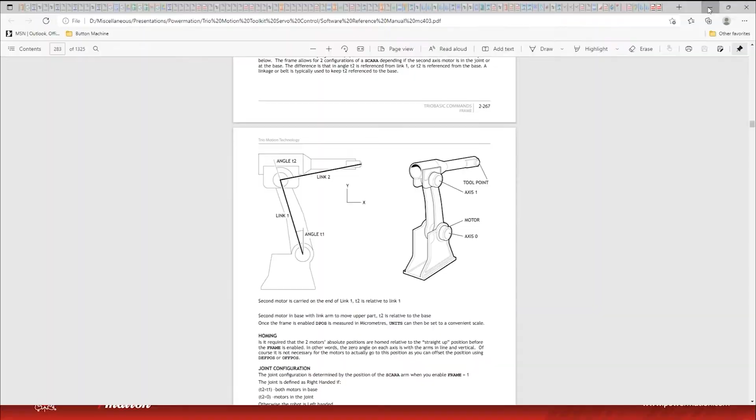The Trio Motion Toolkit is an add-on toolkit that supports the Trio Motion controllers and runs multi-axis motion for both steppers and servo applications. It's a full instrument driver library with supporting examples, with future support of EtherCAT drives and motors. The toolkit was developed with NI and approved by their LabVIEW Tools network and installed using the VI Package Manager. I will now give demos of different servo examples.

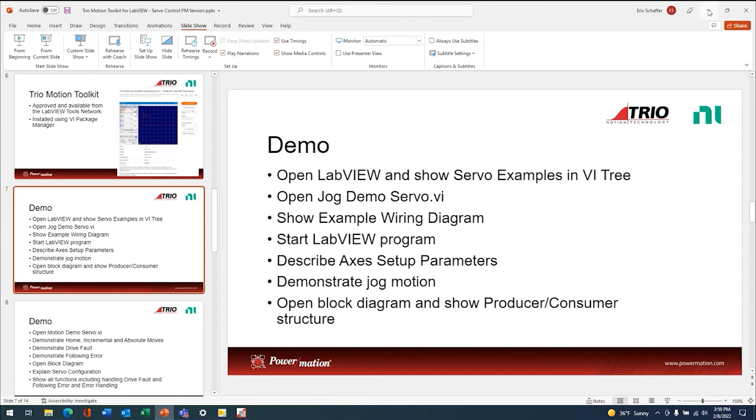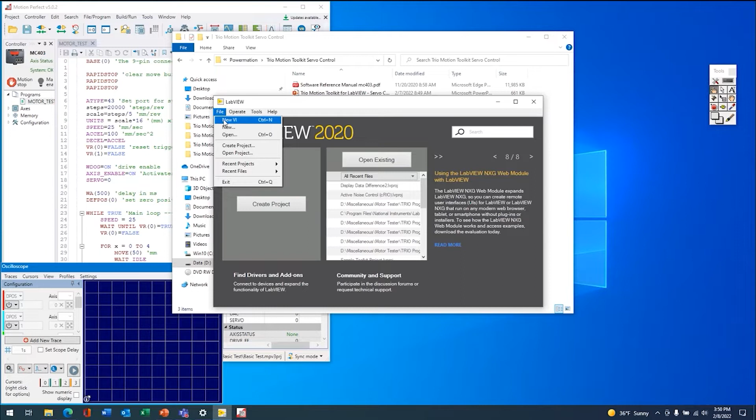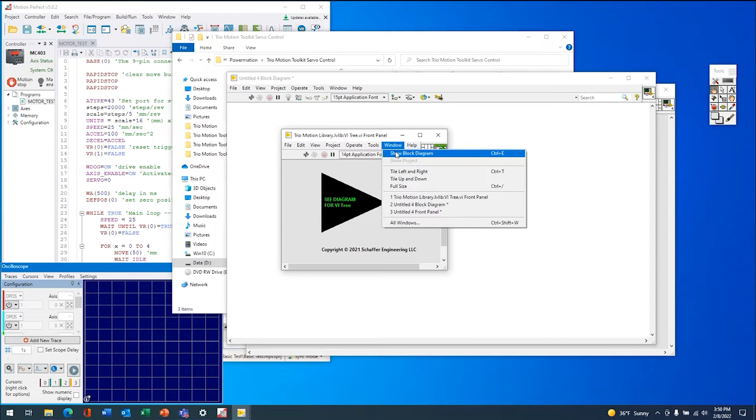So how do we find any of these examples? We can go and look on the palette under Instrument I/O, Instrument Drivers, and then select the Trio Motion palette. As with other instrument drivers, we can use the VI tree, and this gives all of the functions available to the programmer. In addition, we can look for the examples. These are the specific examples for servoing. So the first thing we're going to look at is the Jog Servo.

The Jog Servo, first we set up the IP address of the Trio, and then we set up the axis parameters. In addition to setting up what kind of apparatus or what kind of tool it is, or motor, this is a servo, we can set up the units, which is here, the units per rev, 25 revs per second, and acceleration at 100.

We can also set up uniquely here the position loop gains, such as the proportional gain, D gain, etc., to start up the axis. And I think a key thing here, Eric, is with these axis parameters, these actually go into your startup routine, right, into the Trio controller. Everything here programs the Trio controller. Yes, J.D. So let's take a look.

We can take a look at the servo here. We can jog forward, and we can jog reverse. In addition, we can demonstrate setting up different parameters here, such as speed. So let's say instead of 25 revs per second, we wanted to run at 50 revs per second.

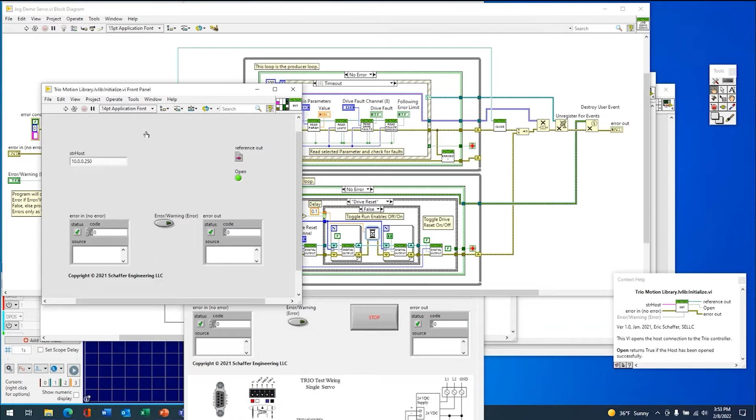So let's see what we get on the block diagram here. Uniquely on the jog routines, I provide a producer-consumer structure that you can use for this routine or any of your other LabVIEW routines. This includes all error handling as well as the producer-consumer structure. In any of these, we show the initialization, which is setting up the IP to the Trio controller and opening the controller communication. In addition, we handle all of the servo setup.

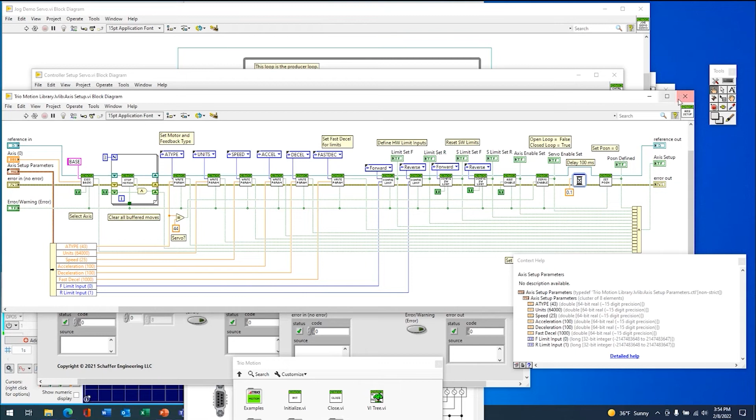From here, we can set up any of the axis parameters, such as the type, speed, accel, any of the limits, and servo enables. In addition, we can have all the gains set up for us.

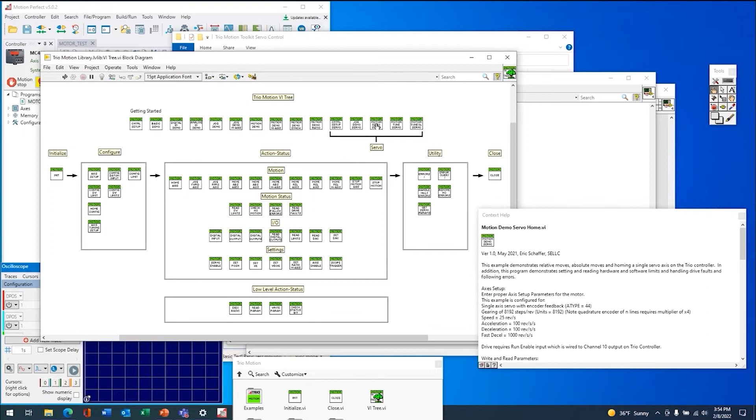So we've seen some jogging, and I think you mentioned something about doing some indexing or some other commands in the servo system. That's right. So what we will look at next is a different example that shows some of the more functions that J.D. was talking about. So here's the motion demo servo. In this one, we can also demonstrate homing. Here we're going to do a creep reverse to the Z marker on the encoder. So let's take a look at that.

Here we can look at move relative motion or a move absolute position. Again, we can take a look at the value here, see what our absolute position is. The other thing that we can take a look at here is how to do drive faults or show drive faults. All of this is explained in all the documentation on testing.

So right now we have hardwired in a drive fault. Let's take a look what happens here if I set it. The error handling picks that up and tells us what actually happened and how to clear it. We can do that right from a function here, drive reset.

The other thing we're going to take a look at is following error. And here, this will explain to us how we can set up a following error. So let's follow it. We're going to set up our speed to 250 revs per second, which is something the controller isn't capable of doing. We'll set a distance of 100 revs. And let's try and make that move and see what happens.

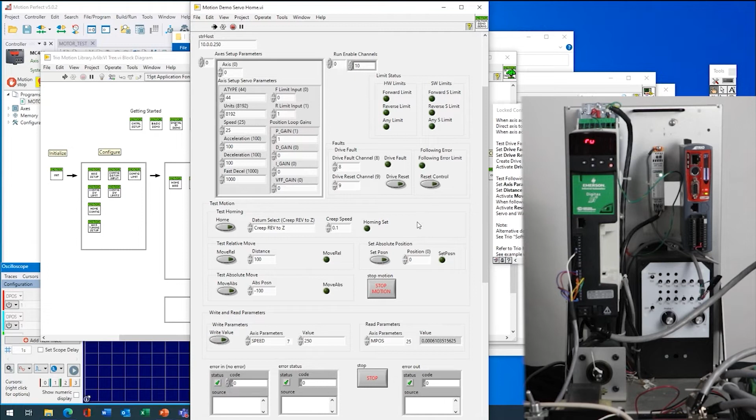Here we can see that the following error is exceeded, and this again is picked up through the error handling, and then it tells us how to clear it. So you've got a built-in troubleshooting guide right into the interface. That's right, so you don't need to be a servo motion expert. That is right. The examples tell us how to do it, and we'll demonstrate actually on the block diagram how to do it. So let's take a look at the block diagram here.

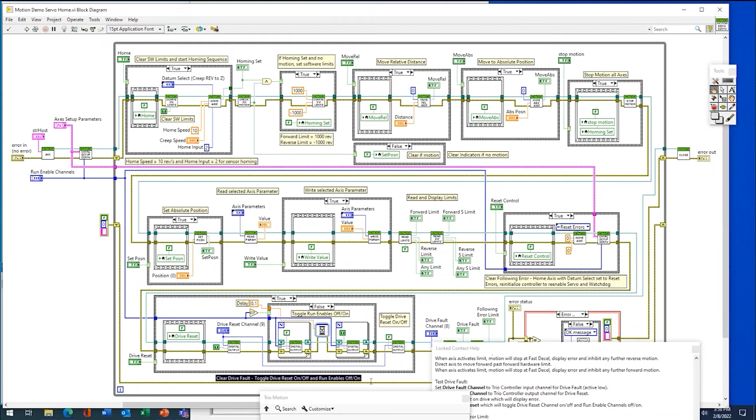Again, this demonstrates the initialization and setup like we have previously. We can then see how to do homing, set up our specific homing function, relative moves, absolute moves, read and write settings, and then here it actually shows you how to clear a following error with examples, and how to clear the drive fault. And there's a lot of information here.

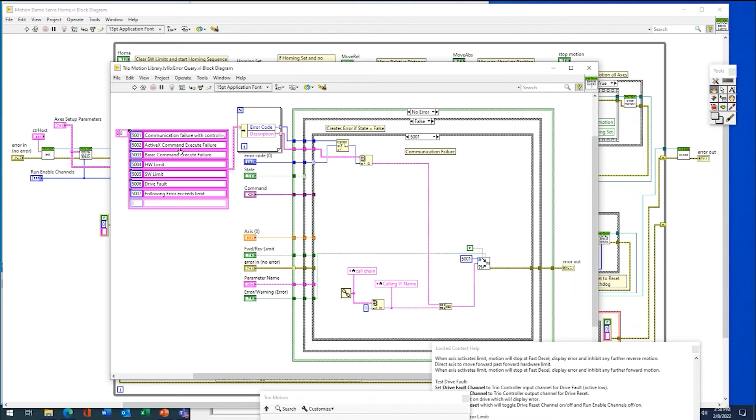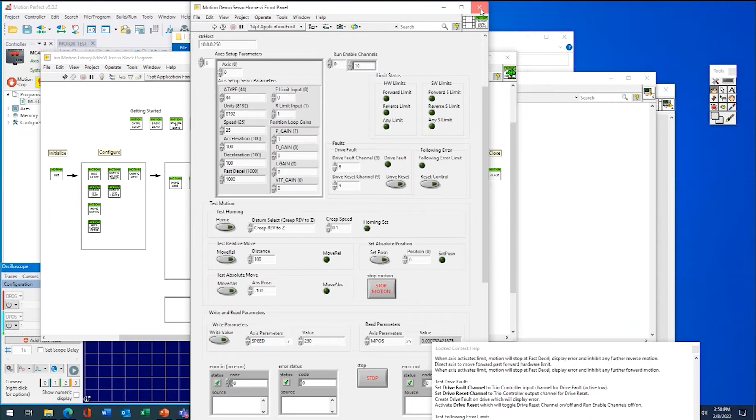Yep. So the other thing we can show you is under all of this we have error handling, which we demonstrated before. So this VI will handle all of your errors and give you explanations for them, everything from communication, command errors, as well as hardware, software limits, drive faults, and following errors, and automatically detects them and gives you those as an error. So that's an example of running. Yeah, that's great. That's a really complete solution that you've got there.

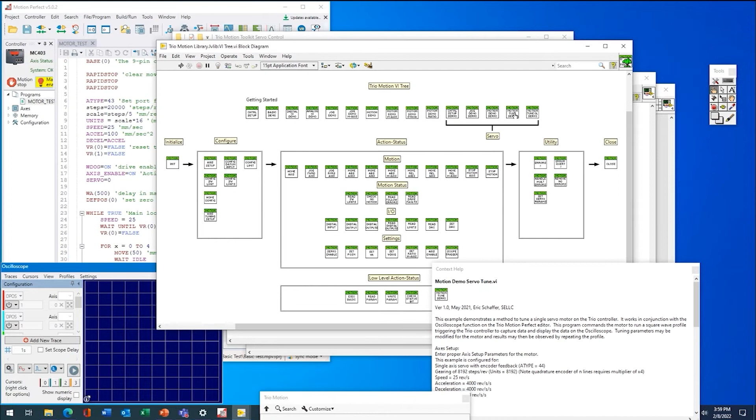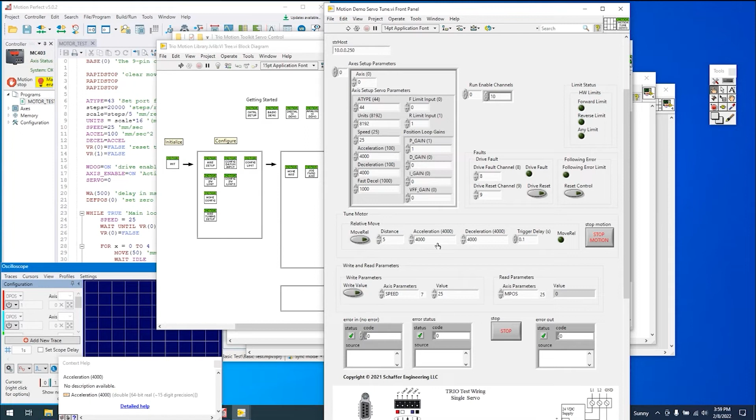So let's take a look at our last thing here today, and let's show how to tune a servo. When you say tuning, what do you really mean? What does tuning mean to a servo? So what we're going to do here, we actually have open loop and closed loop tuning. What we're going to demonstrate here is closed loop tuning. So we're going to throw a square wave that we define into the motor, and we're going to take a look at what the actual output looks like.

What is really handy is that Motion Perfect gives us an oscilloscope function that we can run interacting with our LabVIEW program. And then we can also import settings, setting it up.

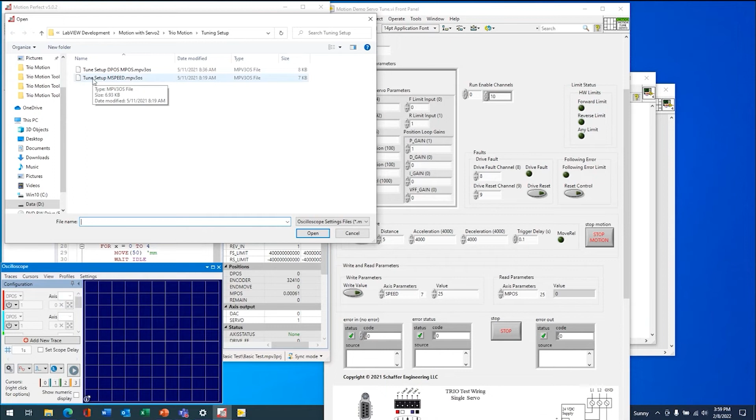So I have included with the LabVIEW folder different tuning setups. So here we're going to use the M-Speed tune-up. This is also defined in the README file how to do this. So you've really taken a lot of the guesswork out of this. You give the complete soft scope. You might hear that term, soft scope. You've got the whole soft scope set up here. A person doesn't really have to be an expert per se in any of this stuff.

That is right. So what we're going to do now is we've set up the scope. We're going to set up a trigger here, and we now have a profile that's set up with a P gain. We're going to throw a square wave in, and we're going to do this move. Again, all the description is in the help files on how to do this tuning. So let's see what happens when we run this and see what we get on the scope.

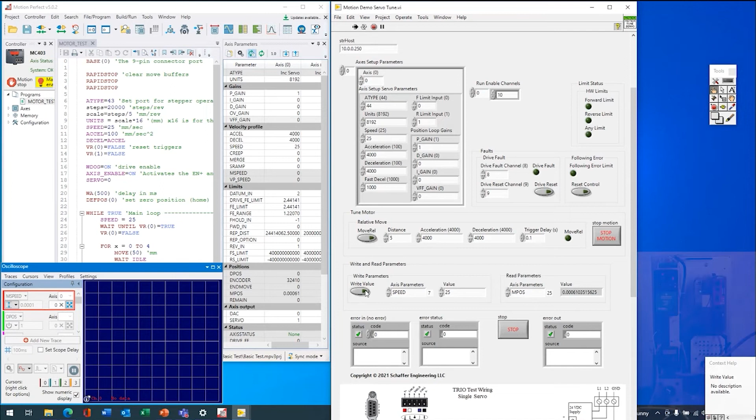Okay, so you see we have some overshoot here. The other thing we can see is we're dithering a little on our stop move. So we're going to go first to the I gain here. Through some experimentation, I've tuned this previously, I know 0.01 is a good value, so let's take a look what happens when we do that. See, just by doing that small tuning on the integral gain, we've pretty well cleared up the dither.

So the other thing I've been working with is I know that a D gain of 2 is a better tuning for this motor. So I'm going to just try that out. I can then clear the scope, and let's try again, see what happens. And you see we have a much better profile. Yeah, just a little bit of overshoot, but comes back and stabilizes fairly quickly. I'm going to expand things a little to give you a better idea.

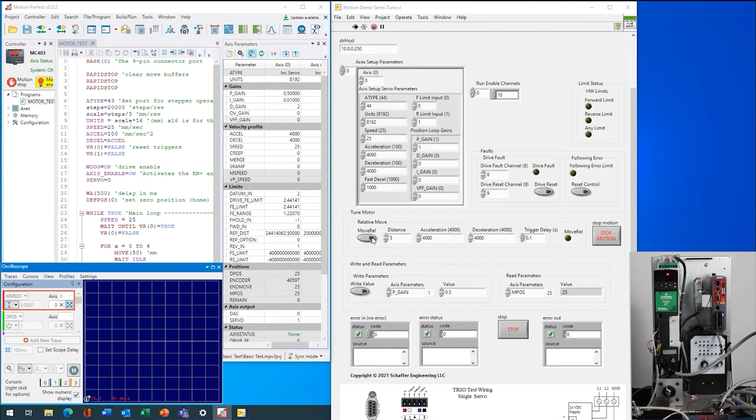I'm going to take the P gain, throw a 1.5 in, and we're going to see what happens there. See, we need to write it first. We're going to clear the scope. And as we expect, it's a little hot. Let's take the P gain to a 0.5 and let's see what happens there. Again, remember to reset a trigger and move. And now you can see we've softened it out. So you have some good handle on tuning your motor.

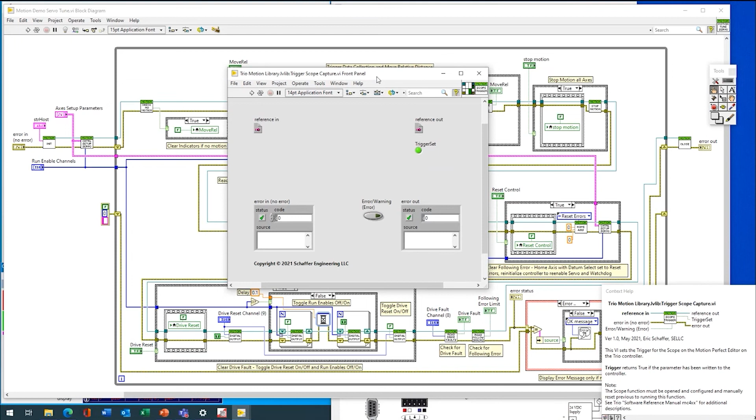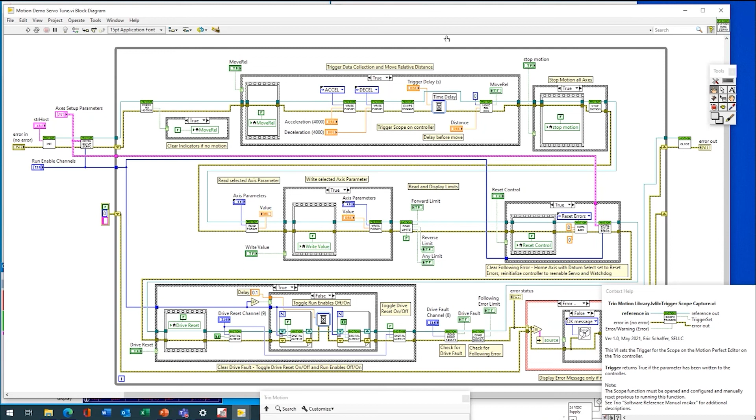So let's take a little look at the block diagram to finish up here. And right here shows how we do the trigger data collection and move. Right here, I've provided a scope function that actually interacts with Motion Perfect to set that trigger. First setting the parameters on our move, set up the trigger and distance, and when we make the move, that trigger then will show up on the Motion Perfect oscilloscope. That pretty well covers what we want to talk about today on the servo motion.

That was awesome, Eric. Where can customers find the Trio Motion Toolkit in the LabVIEW environment? That's a great question, J.D. Here's where you find the Trio Motion Toolkit. Go to any of your LabVIEW programs and under the Tools pull-down, go to Find LabVIEW Add-ons. That'll bring you directly to the Trio Motion Toolkit under the NI Tools Network. There, type in Trio, select Trio Motion Toolkit, and you will then be able to load it from the Trio Motion Toolkit screen and purchase it directly from NI.